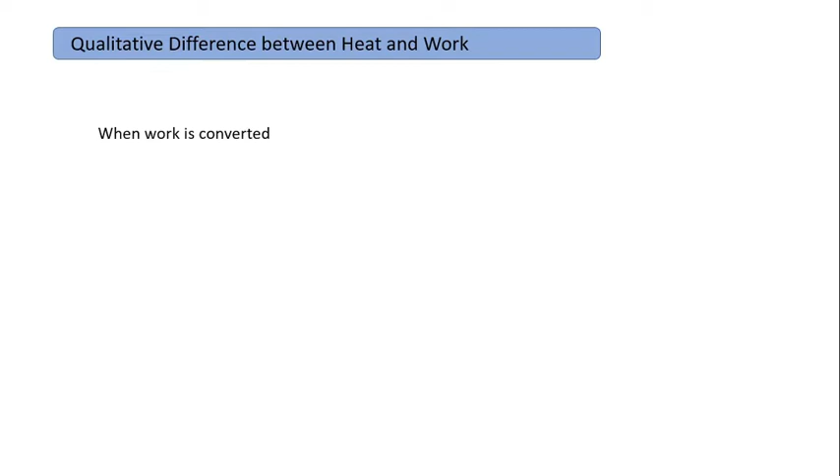Joule's experiments demonstrate that energy, when supplied to a system in the form of work, can be completely converted into heat. But the complete conversion of heat into work in a cycle is not possible. So, heat and work are not completely interchangeable forms of energy. When work is converted into heat, we always have work equals heat. But when heat is converted into work in a complete closed cycle process, we always have Q, that is heat, greater than work. That means the heat that is converted into work will always be greater. These arrows here indicate the direction of energy transformation.

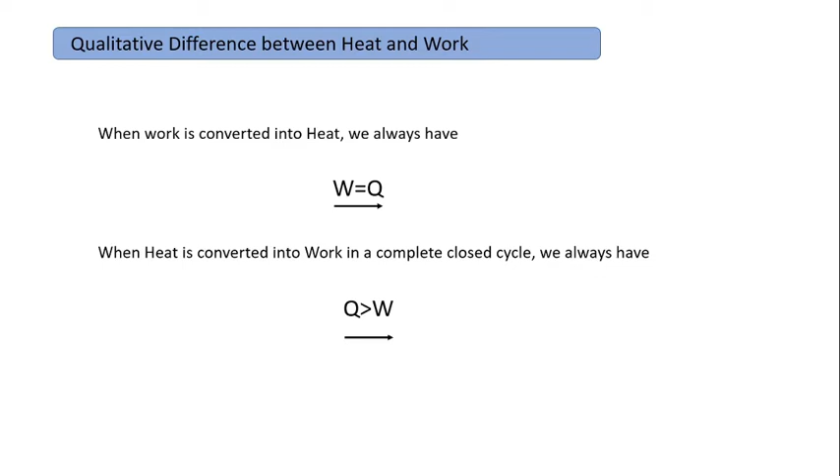So in the second law we basically have two statements. Number one is the Kelvin-Planck statement and another one is the Clausius statement. So from the Kelvin-Planck statement we come to know that it is impossible for a heat engine to produce net work in a complete cycle if it exchanges heat only with bodies at a single fixed temperature. So what is the meaning of the Kelvin-Planck statement?

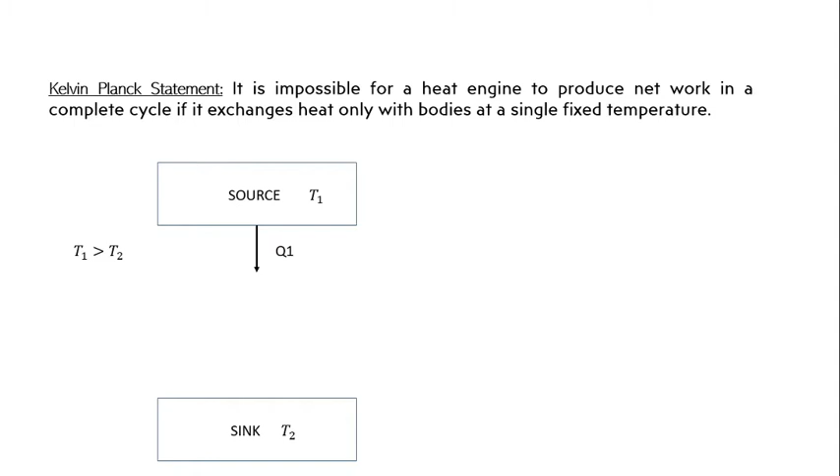So if we have a source of temperature T1 and we have another body which is termed as sink whose temperature is T2, and if T1 is greater than T2, then from the law of nature or law of thermodynamics we know that heat will always flow from the higher temperature to lower temperature, that means from source to sink, from T1 to T2. But now if we want to convert this heat into useful work, we have to add a device which is termed as heat engine.

This heat engine will receive the heat and it will deliver some work. But according to the Kelvin-Planck statement, during this process there will be some amount of heat rejection by the heat engine which will go to the sink. So in this picture it is clear that the heat engine is absorbing Q1 quantity of heat from the source, it is delivering W quantity of work output, and it is rejecting Q2 quantity of heat to the sink. So from the first law we can write that Q1 minus Q2 equals W.

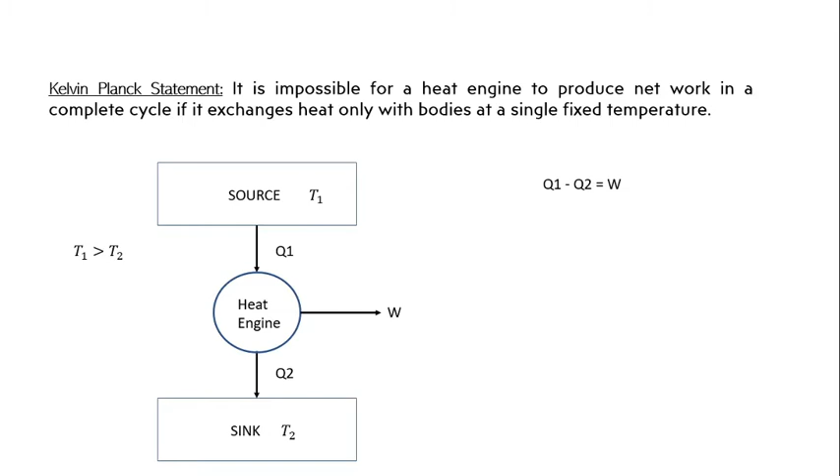So now if we want to calculate the thermal efficiency of the heat engine, we know that the thermal efficiency of any heat engine is the work done by heat supplied, and from the figure it is clear that the work done is W and the heat supplied is Q1. So the efficiency or the thermal efficiency of the heat engine now becomes W by Q1.

And if we replace the W with Q1 minus Q2, which we have found here, then the equation becomes like this, which is 1 minus Q2 by Q1. So this is the thermal efficiency of any heat engine which is working between the two temperature limits.

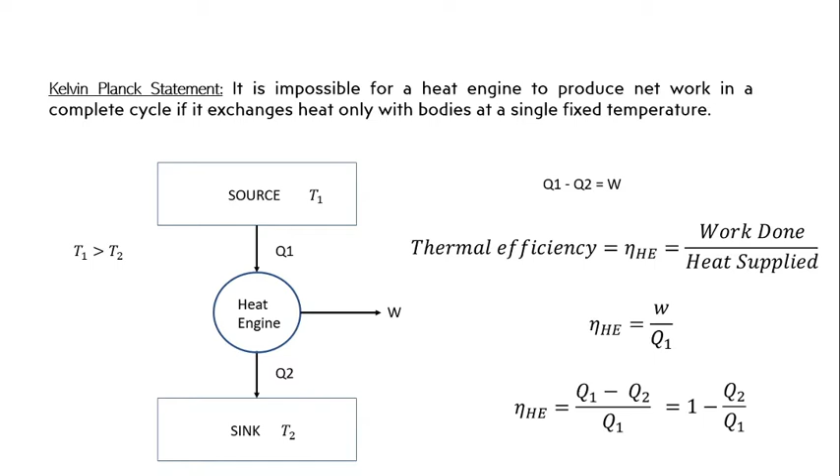The next statement of second law is the Clausius statement. So according to the Clausius statement, it is impossible to construct a device which, operating in a cycle, will produce no effect other than transfer of heat from a low temperature body to high temperature body. So what is the meaning of this Clausius statement?

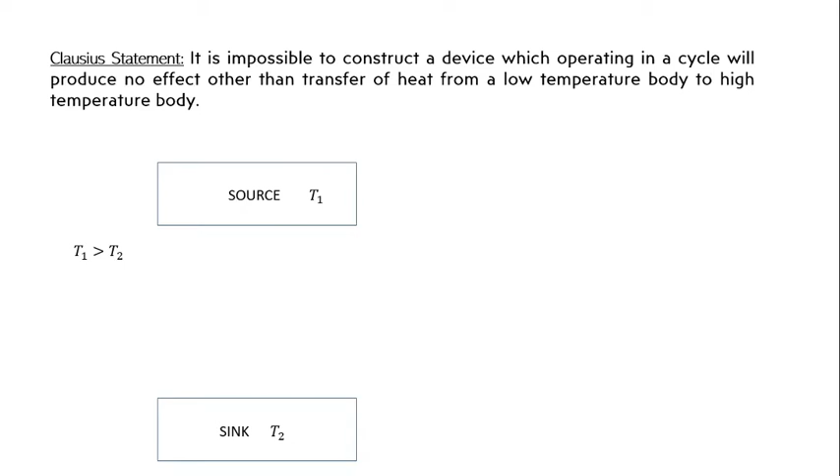So let us assume we have a temperature body which is termed as source and whose temperature is T1, and we have a temperature body which is termed as sink and whose temperature is T2, and here T1 is greater than T2. So from the natural law, it is impossible to transfer heat from the lower temperature body to the higher temperature body.

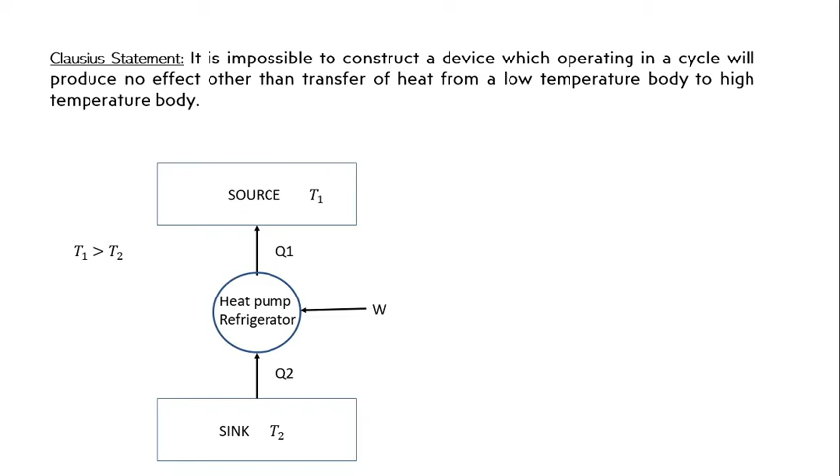That means it is impossible to transfer heat from sink to source unless and until we add some device which is termed as heat pump or refrigerator, whose function is basically to transfer heat from the lower temperature body to the higher temperature body with the help of some external work. So in this figure it is clear that these devices can transfer heat from the lower temperature body to a higher temperature body at the expense of some external work done. So we can say that Q2 plus W equals Q1.

So now there is a term which is related to the heat pump or refrigerator, and that term is coefficient of performance, because the thermodynamic cycle of these two devices is the same, but the application of these is slightly different. So we have a term coefficient of performance instead of the term thermal efficiency. So basically the coefficient of performance is the useful refrigeration or the desired output divided by the net work done.

So the COP for refrigeration can be written as Q2 by W, which is Q2 by Q1 minus Q2. The COP of heat pump is Q1 by Q1 minus Q2. When we are calculating the COP of refrigeration, the desired output here is Q2, because the main application of a refrigerator is to maintain the lower temperature body at a fixed temperature. That means if we have to maintain the sink temperature at T2, we have to extract Q2 quantity of heat. That's why the desired output in this case is Q2.

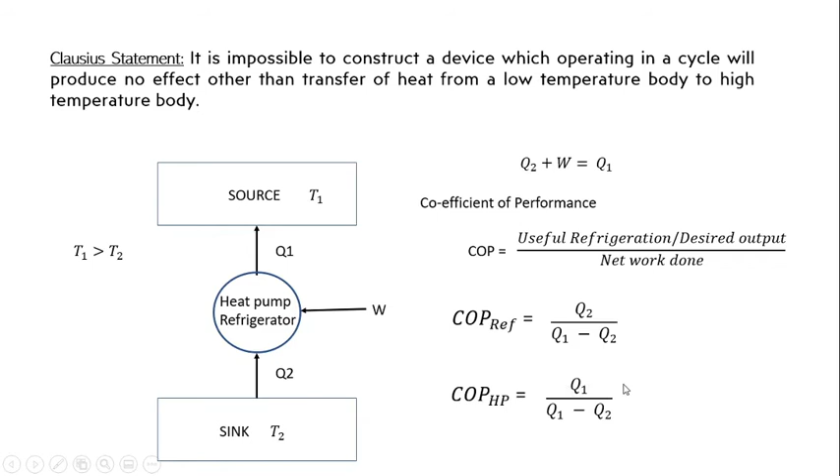And for the COP of heat pump, we know the application of heat pump is related to the temperature of the higher temperature body. That means if this heat pump has to maintain the temperature of the source at T1, it has to deliver Q1 quantity of heat, and that's why the COP of heat pump is Q1 by Q1 minus Q2, because Q1 is the desired output for the heat pump.

So in the previous slide I have shown you that the COP of refrigerator is Q2 by Q1 minus Q2, and if we add 1 to both sides of the equation, we will get that the COP of refrigeration plus 1 equals Q1 by Q1 minus Q2, which is nothing but the COP of heat pump. So we can say that COP of refrigeration plus 1 equals COP of heat pump.

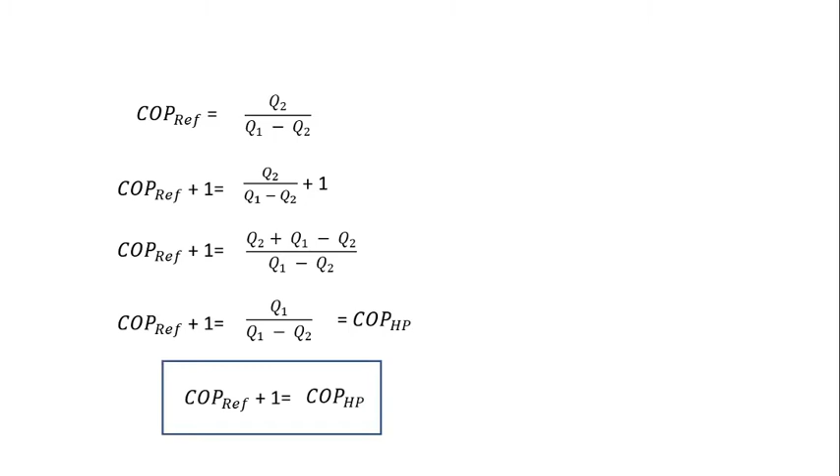So from the general point of view, it might seem that there is no relation between the Kelvin-Planck statement and the Clausius statement, but they are virtually two parallel statements of second law and are equivalent in all aspects. The equivalence of the two statements will be proved if it can be shown that the violation of one statement implies the violation of the second one and vice versa.

So let us first consider how the violation of Kelvin-Planck statement leads to violation of Clausius statement. For that we are taking a source whose temperature is T1, and a sink whose temperature is T2, and here T1 is greater than T2.

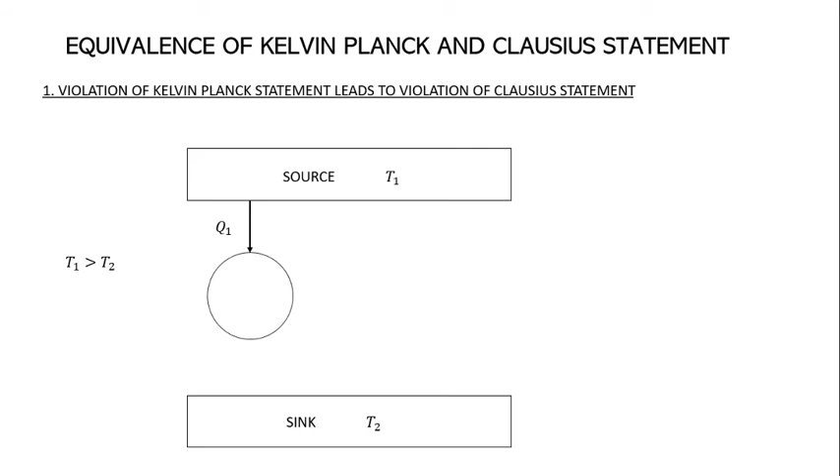And according to the Kelvin-Planck statement, when we have to convert heat into work, we have to add some heat engine, as we have learned in the last class, and upon violating the Kelvin-Planck statement, we are saying that the Q2 term is 0. That means the heat engine is only absorbing Q1 quantity of heat and it is delivering W quantity of work without ejecting any kind of heat.

That means the total heat is here converted into work, which is the violation of the Kelvin-Planck statement, because according to the Kelvin-Planck statement we know that for this there must be some amount of heat ejection and there must be two temperature bodies, which is a source and a sink.

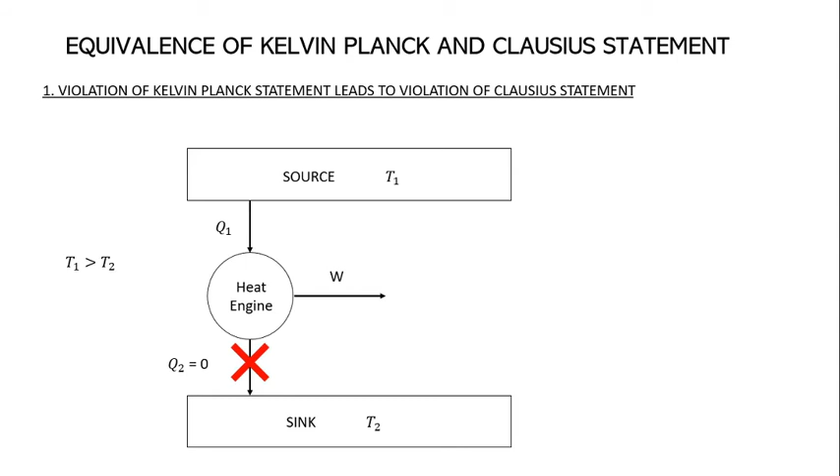And now if we apply a heat pump or a refrigerator within the same temperature limits, then this heat pump will draw Q2 quantity of heat from the sink and it will deliver Q2 plus W, which is Q1 quantity of heat, to the source. And for that we are assuming that the heat engine is developing W quantity of work, and this heat pump is taking the W quantity of work to deliver the heat from sink to the source.

So now, as in this picture, it is clear that the heat pump or the refrigerator is delivering some quantity of heat to the source, and this heat engine is extracting Q1 quantity of heat from the source. So the hot reservoir or the source can be eliminated and the heat discharged by the heat pump can be fed to the heat engine.

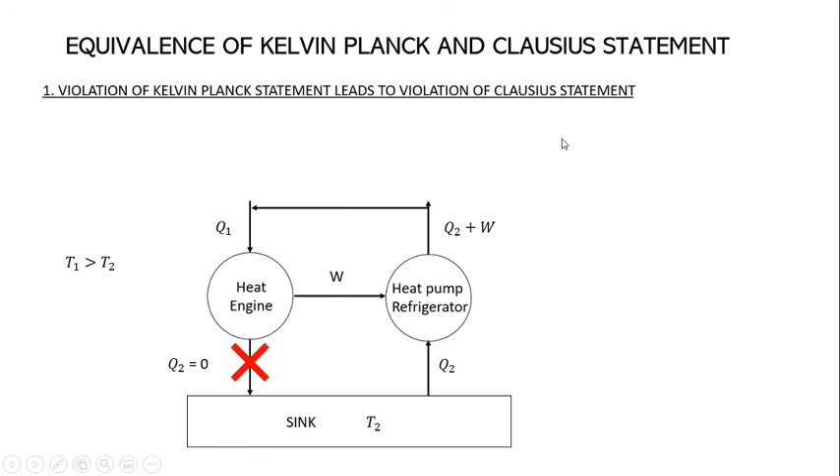So from the figure now it is clear that the heat engine and this heat pump or refrigerator together constitute a heat pump which is working in a cycle and producing the sole effect of transferring heat from a lower temperature body to a higher temperature body without any external work done. So this is the violation of the Clausius statement. So from this it is clear that if we violate the Kelvin-Planck statement, the violation of the Clausius statement happens automatically.

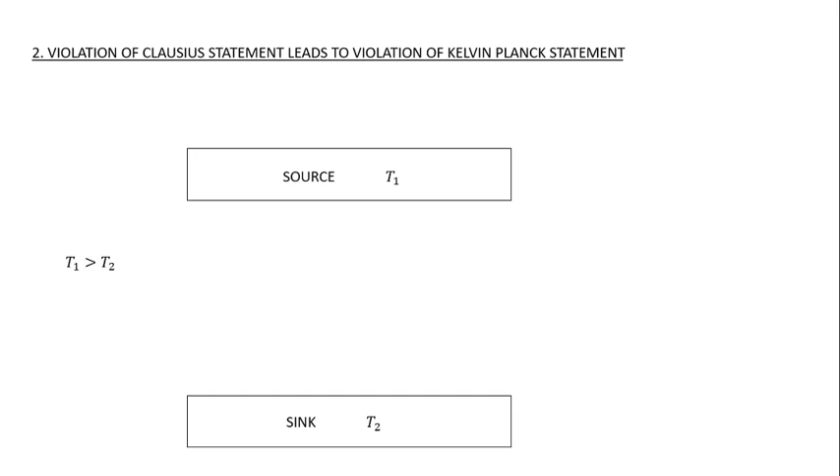Now we will show that the violation of the Clausius statement leads to violation of the Kelvin-Planck statement, and for that we are doing the same thing as we have done. We are taking a source of temperature T1 and a sink of temperature T2, where T1 is greater than T2, and we are attaching here some heat pump or refrigerator which is delivering Q2 quantity of heat from the lower temperature body to the higher temperature body.

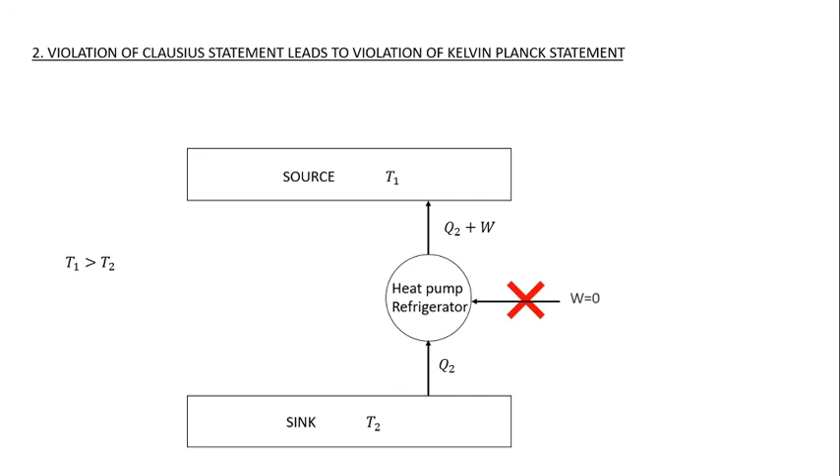But as we are violating the Clausius statement, we are assuming that it doesn't require any external work done. That means upon violating the Clausius statement, we are thinking that this heat pump or refrigerator is transferring heat from a lower temperature body to a higher temperature body without any external work input.

And then we add a heat engine within the same temperature limits, and this heat engine is receiving Q1 quantity of heat from the source and it is delivering W quantity of work done. So from the figure it is clear that the heat pump or the refrigerator is delivering some quantity of heat to the source, and this heat engine is receiving Q1 quantity of heat from the source.

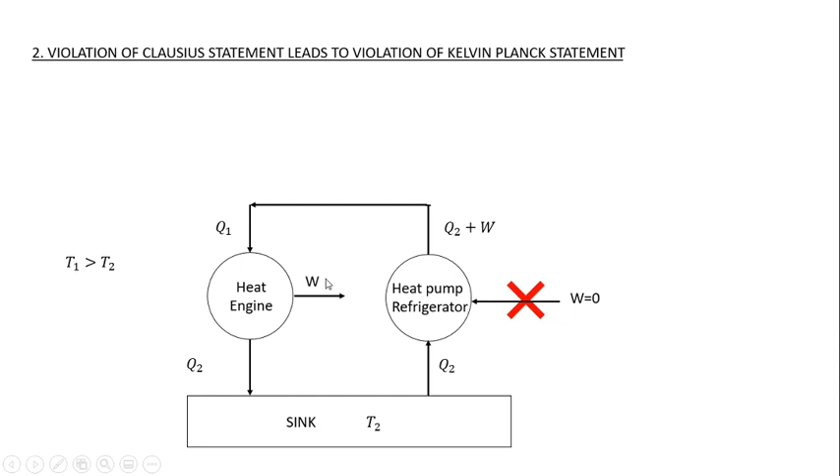So the source or the hot reservoir can be eliminated and the heat pump can deliver the heat to the heat engine directly. So now from this figure we can say that the heat pump and the heat engine, acting together, constitute a heat engine which is operating in a cycle and producing net work W while exchanging heat only with one body, that is the sink, which is at a single fixed temperature,

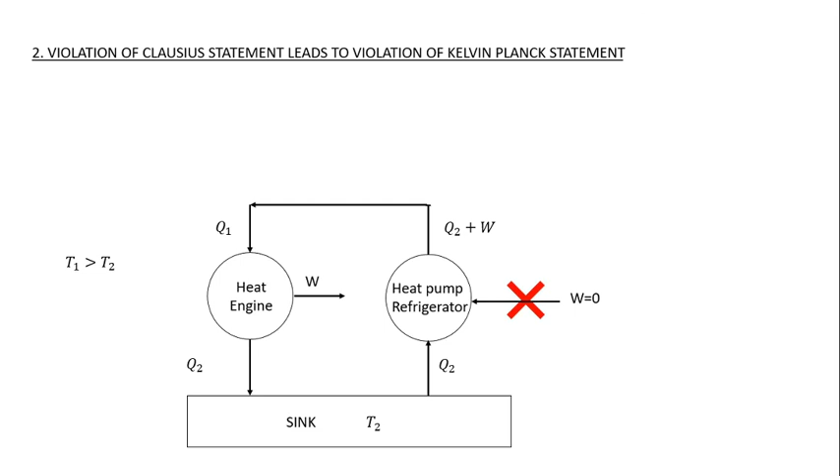which violates the Kelvin-Planck statement. So from these two examples it is clear that if we violate one statement, the other statement will be violated automatically. So we can say that there is a relation between the Clausius statement and the Kelvin-Planck statement, and we can say that those statements are equivalent to each other in all aspects.